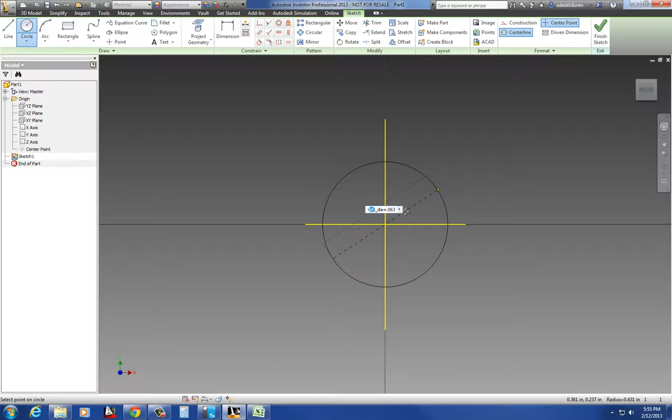We're going to start with the first one, on page 7, the valve spring keeper pin. It just has 2 diameters here. So I typed in shaft underscore dia equal 0.063, and that created my parameter for me. If I hover over this and click on this, you'll see the parameter right here for that dimension.

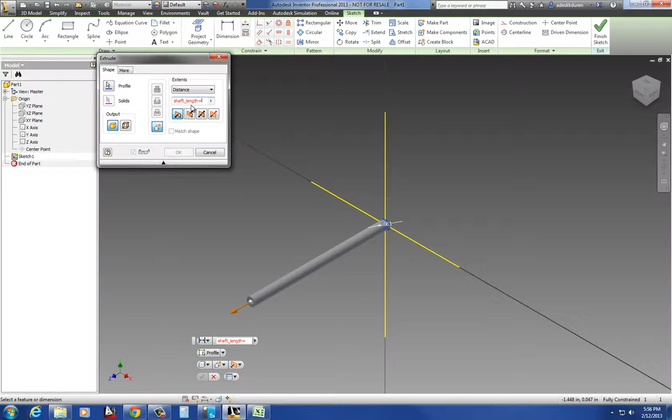Alright, I'm going to hit E for extrude, and in extrusion that's where I'm going to put the parameter for the length. Equal, and that is 0.24, and that's solid, and say OK.

So right away I already have 2 parameters. So now I'm going to go to the next part. On page 8 I've got a rocker arm roller pin. The rocker arm roller pin has multiple features. It has a different diameter, a different length, and then an undercut, an end chamfer, and a flange.

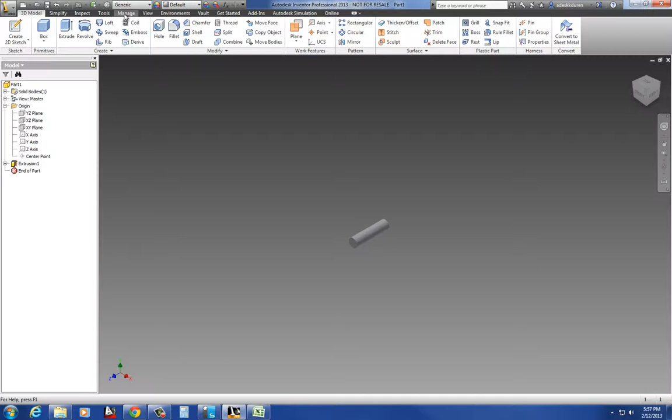So now we're going to go back to our part, and we're going to create this as an iPart. I'm going to go to Manage, and I'm going to create an iPart. Now something I want to show you guys here is something under Options. Under Options, I'm going to set this to a value of a part number, and the part number is the root number, not the extension.

So now if I put my part number in here, we go back—what was that number? This one? Yes. I'm just going to take the root, and I'm going to put the root right here. So as you notice down here, it takes the root, it puts a separator in, it starts at 1, and it has 3 digits. Does that make sense? Alright, and we're going to set the member name to the part number.

Say OK. Yes. So now when I get over here, here's my member name, should be my part number, and I need to save this part, so that will give it that part number. That member name will be our base part number.

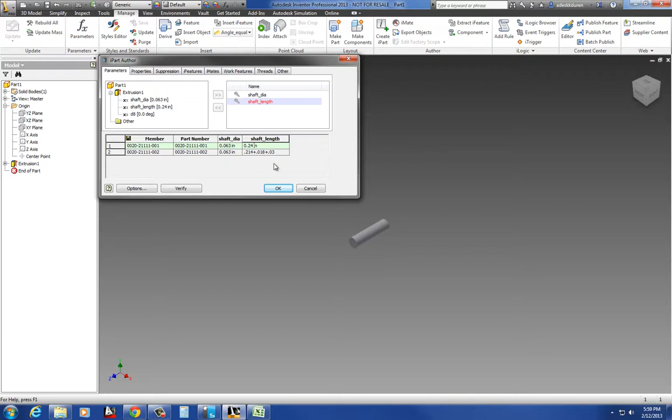Yes, but it has to be set up before you ever import it. Yeah, yeah. So I can show you guys that if you want me to, another time.

On this one, the diameter we saw was 125. So you can either copy it and paste it, or you can just put it in manually, and say OK.

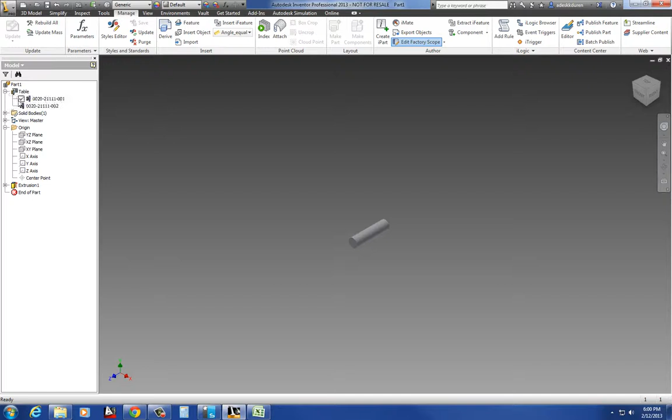So now I have my table, I have -1 and I have -2. Alright, so now that I'm in -2, I'm going to create the other features that I'm going to be computing or suppressing in -1. Does that make sense?

Okay, so from this one, I'm going to put a flange on here. I'm going to create a sketch on that face, and that diameter is 0.187.

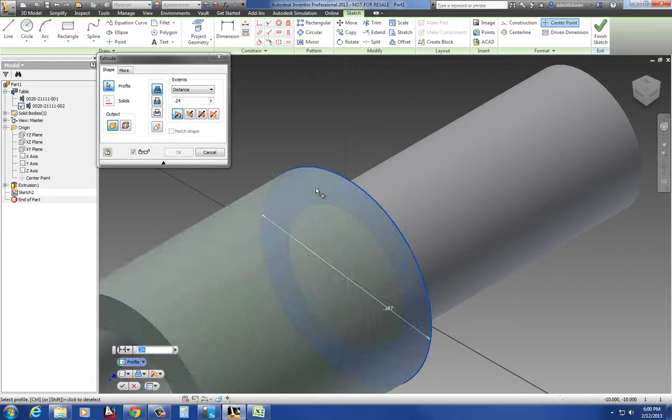And I'm going to hit extrude. I'm going to select this one, and I'm going to put in here my flange length. Equals, and that is 0.025.

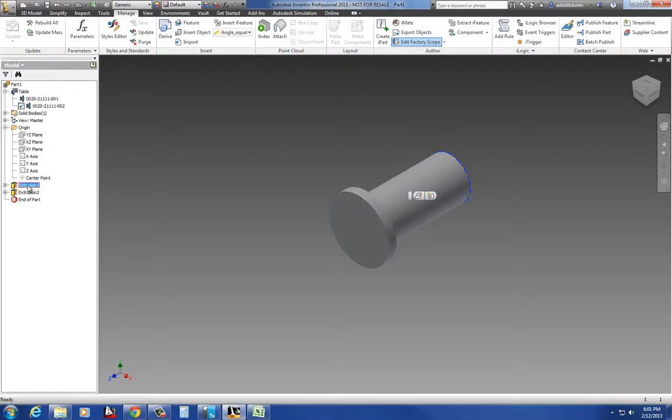Okay, now I'm going to name these. I'm going to name this shaft, and I'm going to name this one flange.

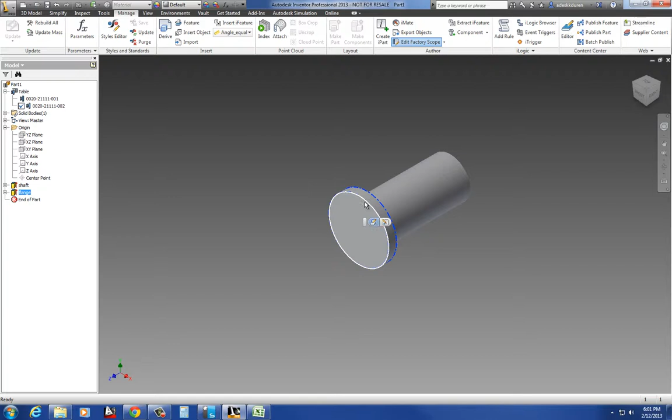We did that when we typed it into the dimension. The question was, do we need to put a label for the diameter of the flange? So the diameter of the flange, did I not do that in here? Very good, thank you. So if I double click on this, it says this is the descriptor, so no, I didn't do that. So I'm going to put in here flange diameter equal. Thank you, finish that one.

And so now, when I go back to my table, I'm going to add something to suppress or compute. And since I named these over here, it's going to be really easy for me to understand what I want over here. So in this one, I want this one to be suppressed in the first part and to compute in the second part. Does that make sense?

Okay. Now if I go back to parameters, I'm going to come down here to the flange, and I'm going to add some other flange parameters.

Alright, so now if I have the flange suppressed, does it even matter what these are? Let's see what it does. Okay, so it doesn't matter about the parameters of the flange if you're not using the flange. Does that make sense? Okay.

So the next thing that we said was that this one is the overall length with the undercut included and the end tip included, and it has a chamfer. So now I'm going to create an undercut on the shaft that I just created. And then I'm going to create an end chamfer and exclude or compute it or suppress it, and then I already have that in there.

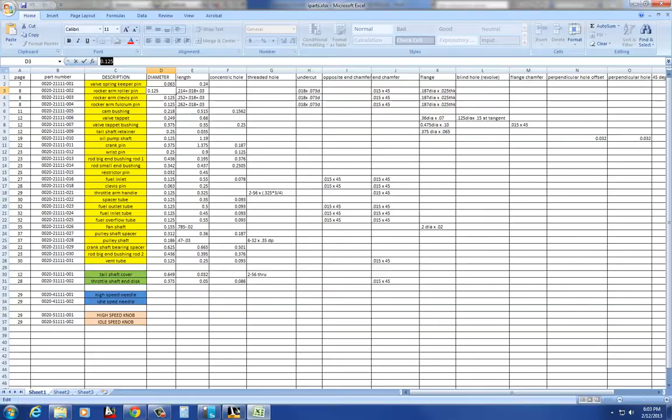So in the undercut, I'm going to create a new feature, find a plane in the middle, create a sketch on it, and right here you can go to slice graphics and it'll show you the center.

So now I'm going to revolve this cut. We just learned this trick from Alberto. We just learned this trick from him. And I'm going to go ahead and project the geometry of the bottom plane because it's that where it's dimensioned from. Okay.

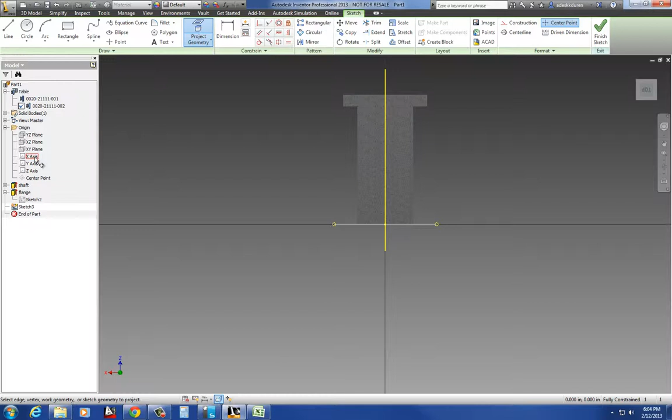And now I can take this and I can turn it to a center line. That was a really nice trick.

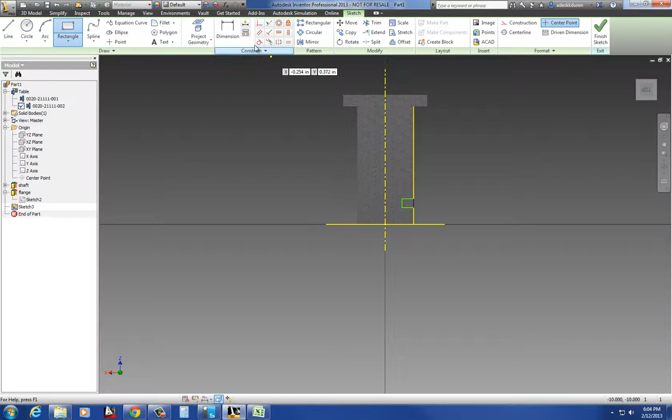Alright, the next thing I need to do is project geometry of the edge of the part so that my cut follows the diameter. So I'm going to put a rectangle in here, and I'm going to put in here the spacing. So I have a dimension for the height of this.

That's not the one I wanted, is it? Delete. Dimension this one. That one's 18 thousandths. And I'm going to go to home and I'm going to put in here undercut width. Okay. Equal.

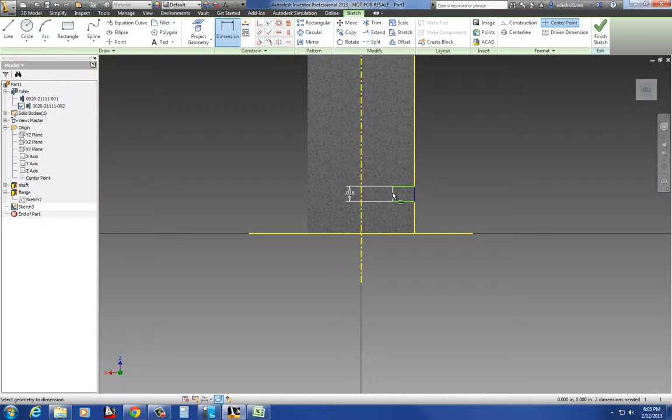Alright, and then the next thing I have is a diameter. So I'm going to put a dimension in here, and to get a diametric dimension, that's another thing that I'm going to be looking for in your sketches. I want to see diametric dimensions when they're called out on here. I don't want to see radial dimensions. So from here to the center line, doesn't matter if it's a point or a line, it gives you a diametric dimension. That one's 0.073.

And if I go to home, this is going to be undercut diameter.

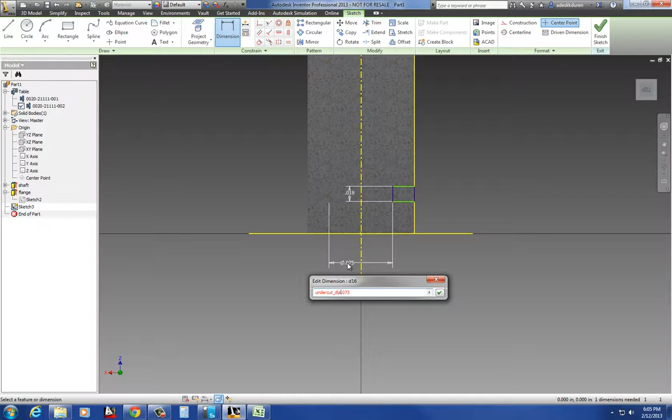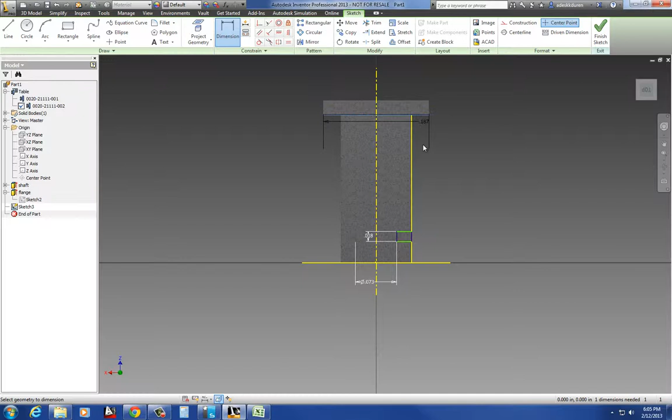And now we just need the undercut location, right? So if I put a dimension on here, there are two ways that this is dimensioned. It's dimensioned from the bottom of the flange. So I can just put that dimension in there. What you want to look at is you want to make sure that all these that have this undercut are dimensioned in the same manner. If you do that, then it's going to maintain, it won't change, the position won't change with the length. Okay, so that's the insight here is that the position won't change with the length, so we have to do it from the other end.

So I'm going to specify that in my parameter. Let's say location. Okay, from opposite the flange, and that's 30 thousandths.

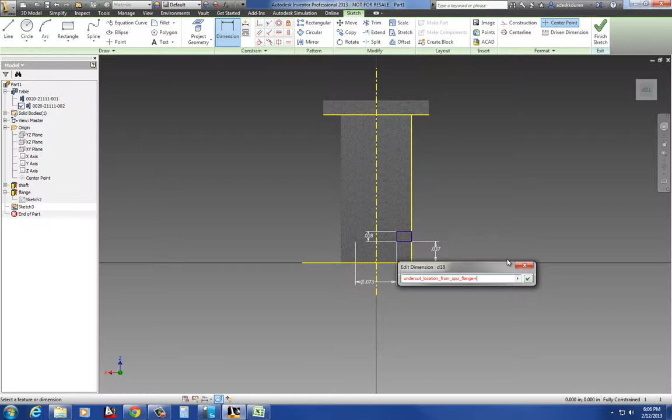Alright, I'm going to hit R for revolve. I'm going to make sure that this is a cut. Say OK. Now I've got that in there, and I'm going to change this to undercut.

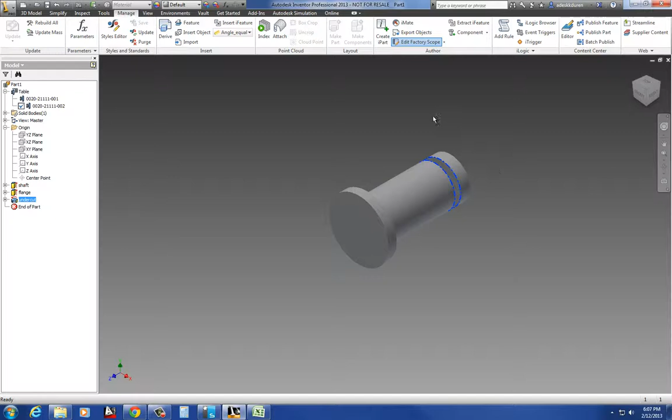Now the next thing that I need is a chamfer. We said that it was 15 thousandths times 45 degrees. So I'm going to go in here and put a chamfer in.

And I'm going to go to home, and I'm going to call this, bless you, chamfer opposite flange equal. I'm going to select my edge. And that was 15 thousandths, right?

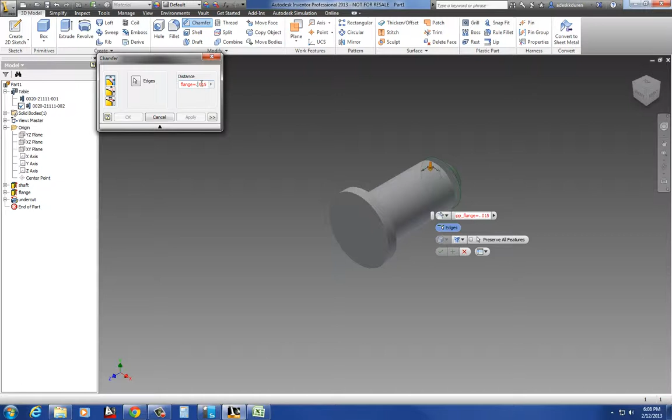Say okay. So now, chamfer on the other end too. It's just very slight. It is very slight. I don't even know what to put on the chamfer on the other end. Let's just leave that one as is. It may be a round even.

Let's call this chamfer opposite flange. Okay, so now I have three features that I'm either going to suppress or compute. I'm going to go to the table, and now I'm going to bring those in.

So suppression, undercut, chamfer. I'm going to suppress them here, S, and S.

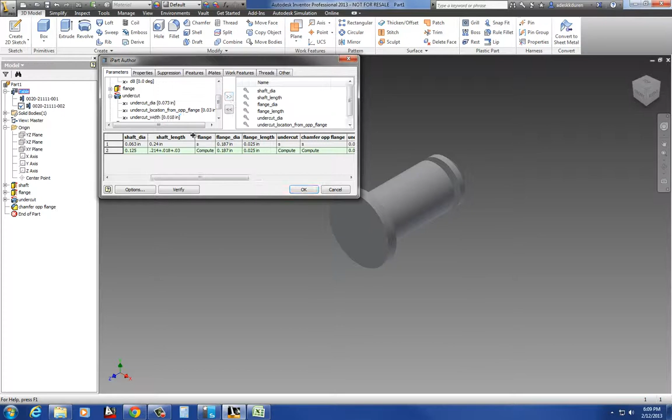Now I need those dimensions from the undercut and the chamfer, so I'm going to go back to parameters and go down to that feature. I've got my undercut, and I'm going to bring these in because I'll be using them for other configurations later. Same thing with the chamfer - they may all be the same, but I'm still going to put it in there. Since this is suppressed, we don't really care about these, it's not going to compute that.

And I'll always just go back and forth and click between the two configurations.

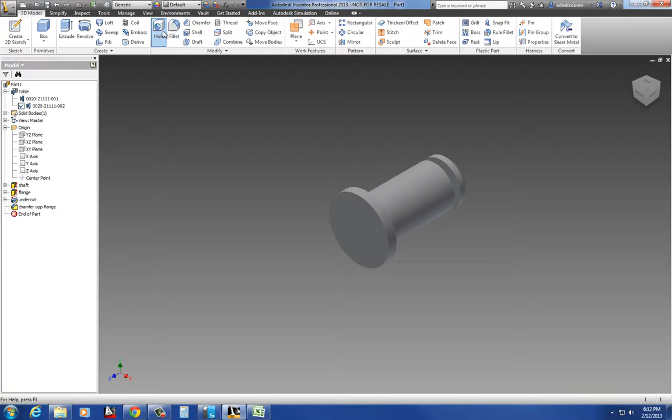We're going to make another mock dash number. So what I'm going to do now is create a hole. It's going to be concentric, and let's say I put it down here on this plane, concentric with this surface, and of course it's huge. So let's make this a threaded hole.

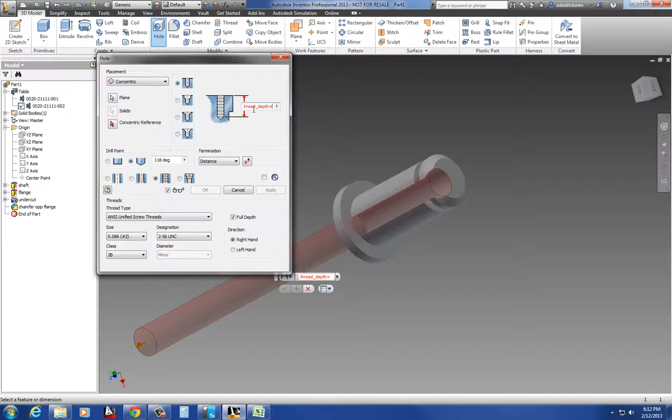So in this distance, I'm going to put in thread depth equal. Let's see how long that pin is - the pin is only like 0.3, so let's make it 0.125. Alright, and it's 2-56, and it's concentric. So everything is good - the termination distance, you want full depth of thread on these holes, on these taps.

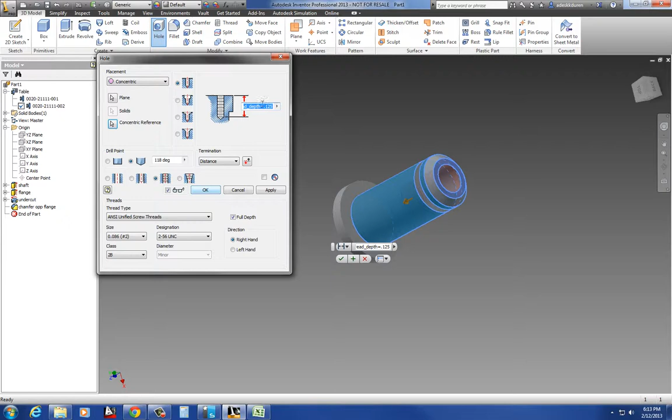And what did I not get? The concentric reference, because it was so large, wouldn't even let me pick it. Let's say okay - now we got the thread depth on this one, we got the thread on this one.

So let's say that we're going to create another configuration, and these are going to be out of order for me. You're going to wait until you get to that point to make the -3. But anyway, we're going to go to suppression, and I need to name this. I'm just putting something in here so that we kind of understand how to do threads.

So let's go back to the table and let's insert one of these. We're going to go to suppression - I'm either going to suppress or compute this. As I go there, I'm going to go to parameters.

I go down to the blind tap tool, and I have the thread depth, and that is just the tip angle, so we're really not going to change the tip angle. That's for your drill tip, and then you're going to tap it, so it doesn't matter what that is.

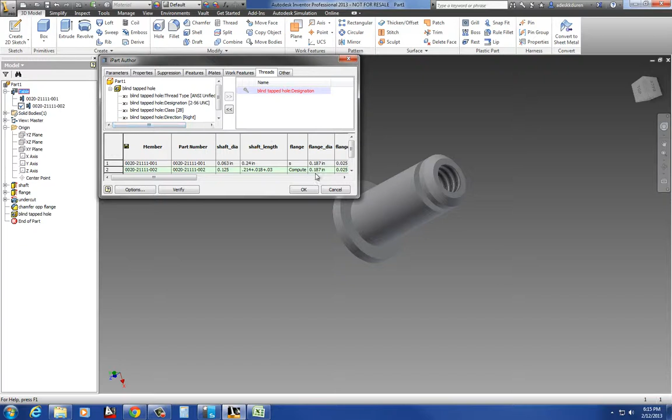We can go to threads here, and I can take this one into account, and I can say that this one is going to be 2-56. Do I want it to be right hand thread? Do I want it to be a class 2B or 2A? You can change all those things. So I'm going to go ahead and put those in, and let's stretch this out and look and see how it looks. Woo!

Alright, so I have a 2-56 hole that's so deep, and I'm going to suppress it in these. I can't tell what this is doing. You can work with this in an Excel format.

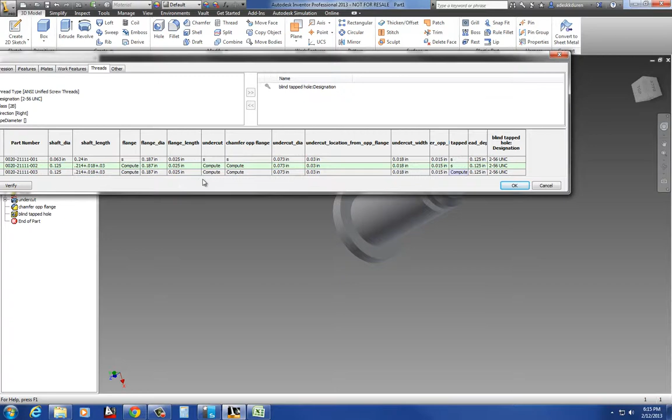Alright, we've got those, and now we're going to create another. Let's go ahead and create another configuration. Let's say on that OK on that one, make sure that made.

-3 now has the blind tapped hole. And let's go in here and let's say we're going to create a -4. And on this one, we might change the thread specification.

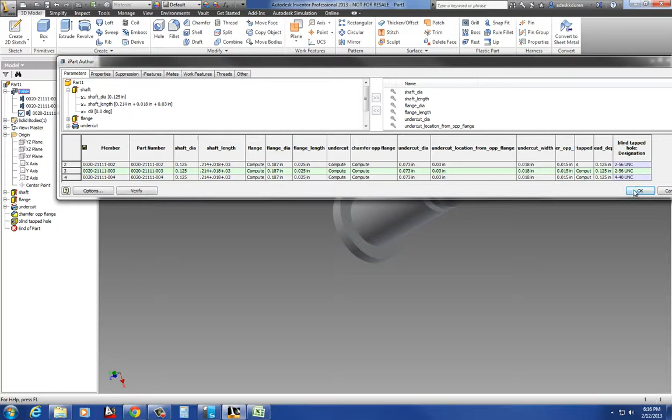Let's see if that'll work. Alright, so it just goes ahead and makes a 4-40 hole the same depth. If I needed it to be a different depth, then I would make it that way.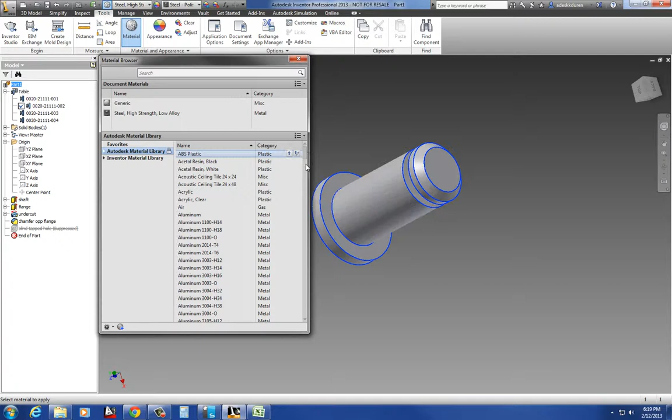So we're going to apply - we've gone to the first one, we applied high strength low alloy steel. And in this one, we're going to make this one stainless steel. So do that to me sometimes. 304 is a good standard stainless steel.

Alright, and let's save this as part number. Then we go back to the table. Where did our material go?

So I'm going to go back to properties and go to physical. I did? Dang it. I did?

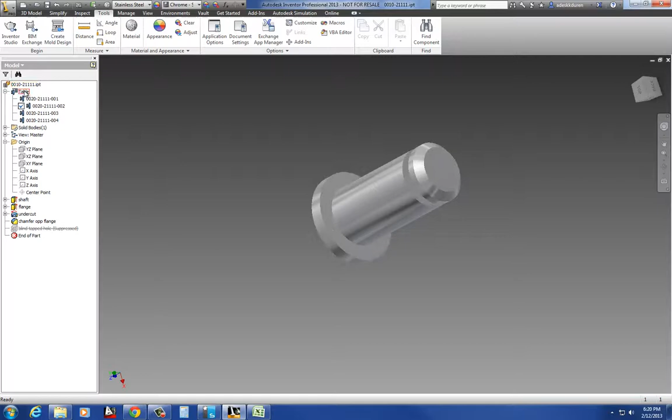Alright, so we're going to go to properties, physical. We're going to bring out the material. And while we might, okay, let's see. So if I go to this one, how am I going to change it?

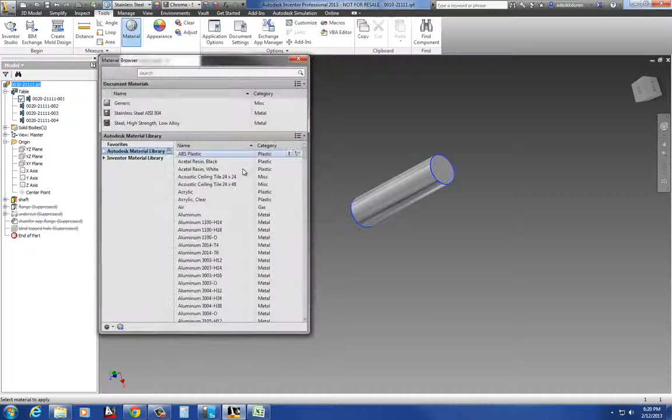Is it doing this to me? This is high strength low alloy steel.

Let's go back to the table. Alright, now let's look at it. Nice. So you could save this for the very last and go in here and change your material properties every time. It's really cool.